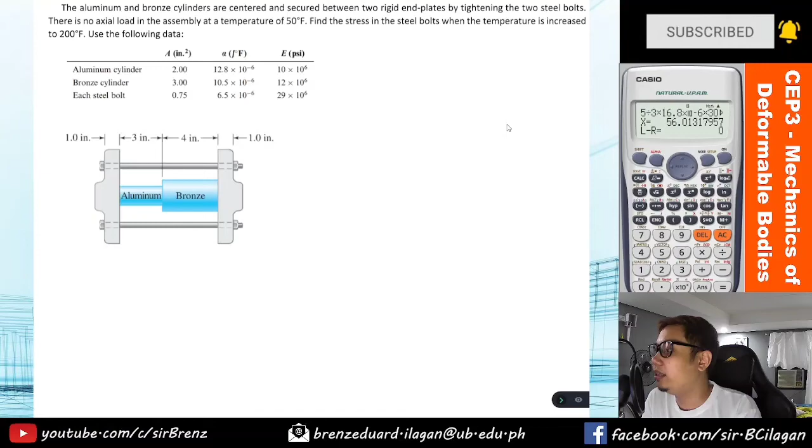So again, the required in this problem is to find the stress in the steel bolts. So guys, ang gawin natin dito, mas maganda if mag-section tayo. Hatiin natin siya ng ganyan. Okay, so ano ba yung makikita natin? So, ang plate, ito yung plate natin.

Again guys, ito yung ating dalawang steel rod. Okay? So, yung aluminum and bronze will cause a force going to the right. Kasi parang gusto niyang kumawala, kasi dahil sa kanyang increase in temperature, humaba siya, nag-expand. So again, yung purpose ni steel is to prevent yung paghihiwalay nung assembly natin.

Okay? So I will name this as my P steel. And then ito, I will let this as my P aluminum plus P bronze, or i-let na lang muna natin siya as P. Okay? So yung P mo is just equal to P aluminum plus P bronze. Okay? So next,

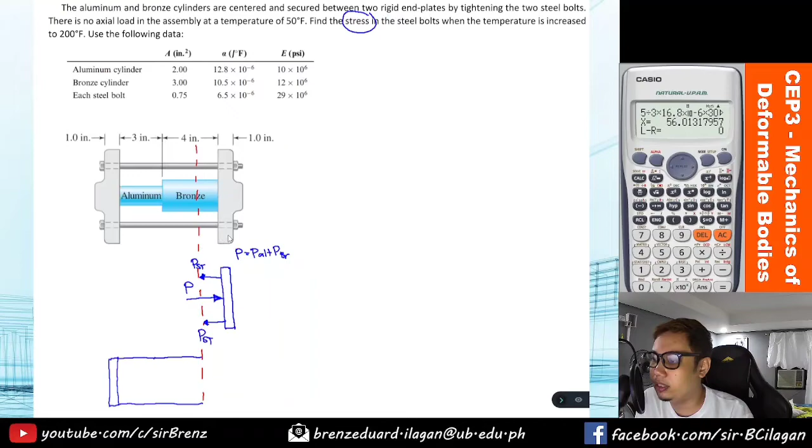So, considering the equilibrium equation, considering this as FBD1. And then yung baba, I will name this as my FBD2. So, considering the free body diagram 1, let's take summation of forces in the x direction. Okay, so assuming all forces to the left are positive. So 2 P steel is just equal to P. Or yung P steel mo is just half of P, or yung sum ng aluminum tsaka yung bronze.

Okay? So, the compatibility equation. Ganito yung mangyayari. Nung sinection natin, or parang inalis natin yung support sa kanya, hinayaan natin mag-expand yung mga materials natin. So, because of the temperature change, yung aluminum and bronze will expand. Pag pinagsama mo yan, sabihin natin na hanggang dito siya. So, ito yung magiging thermal deformation ni aluminum at saka ni bronze.

Okay? So, next, considering yung steel, sabi ko nga kanina, hindi naman ibig sabihin na steel yan, hindi na siya maaapektuhan ng change in temperature. So, syempre, magde-deform pa rin siya. So, ang ating direction dito ng steel is going in this direction.

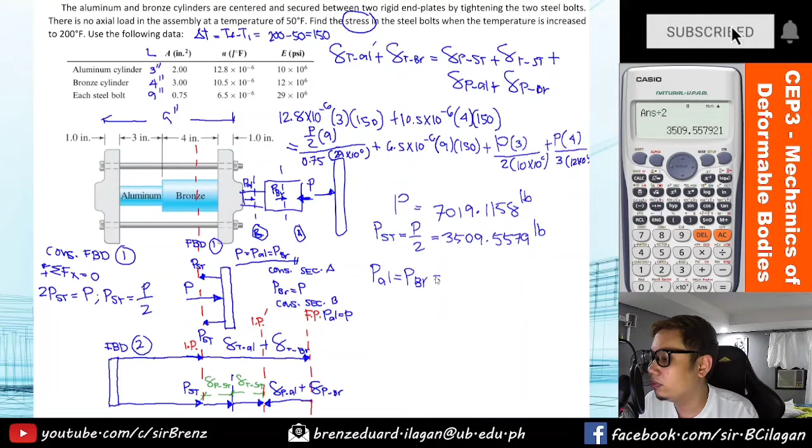Or that is equal to 3509.5579 pounds. And then yung P, equal lang sa P aluminum and P bronze, which is 7019.1158. So ano bang hinahanap? Find the stress in the steel bolts. So yung nakuha nating sagot for P steel, i-divide lang natin sa area. The stress in the steel bolts is equal to P of steel over area ng steel. So that is 3509.5579 divided by the area of the steel, 0.75.

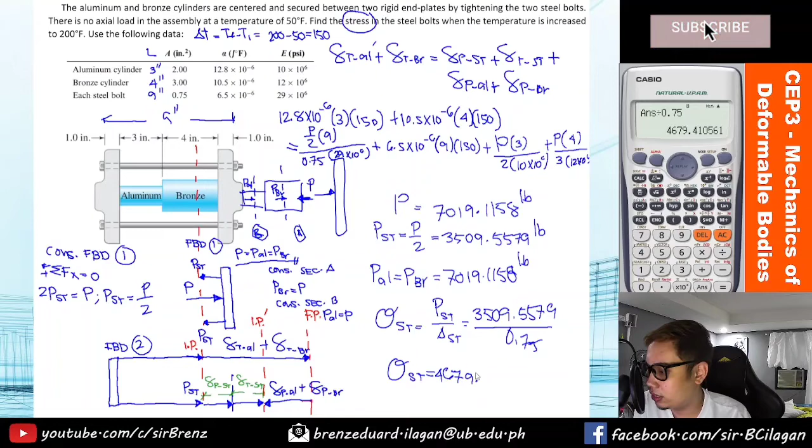So answer divided by 0.75. That is 4679.4106. This is in PSI. Okay? So guys, in case ipahanap sa inyo yung stress in aluminum and bronze, madali lang din. Yung mga nakuha mong value, i-divide mo lang ng corresponding area. Again, I'll give you 3 minutes to copy the solution. You may start copying.